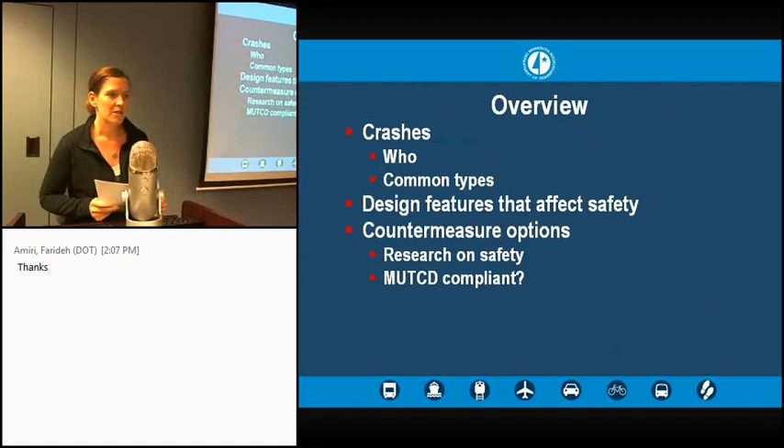Like Ken said, what we're going to cover today is really common crash types. Who is the most at risk to be in an accident as a bicycle or pedestrian? And common types of crashes, what causes bike and pedestrian crashes most often. Also, different design features that affect the safety of bikes and peds, and then countermeasure options. And I'll give a little bit of background on any research that's been done, and whether or not it's MUTCD compliant or experimental.

So, just some data. Last year, there were 868 pedestrian injuries and fatalities, and 35 of those were pedestrians who were killed. And then there were 822 cyclist injuries or fatalities and 6 cyclists killed. We often talk about how low the numbers are for pedestrian and bicycle fatalities, but I just wanted to point out how high the numbers are for crashes.

Or injuries actually. And a lot of these aren't necessarily serious injuries, but my argument is that any time a cyclist or pedestrian is getting tapped or injured or hurt, that's a problem. It doesn't take that much more speed or that much of a twist in fate, and it turns into a fatality. So these are things that we do need to pay attention to.

The national statistics also show that children, the elderly, racial and ethnic minorities, and economically disadvantaged areas are places that we really need to focus our efforts on too.

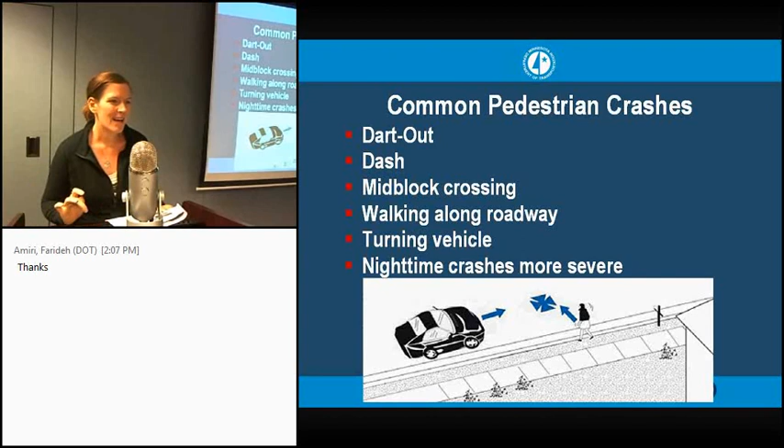So common bicyclist crashes at stop signs, actually the problem is both cars and bikes disobeying stop signs. And then alleys and driveways, if you've ever either ridden a bike past a driveway or had a car coming out of a driveway, it's often an expectation problem. You know, cyclists come up pretty fast on the sidewalks or trails, so just watching for those.

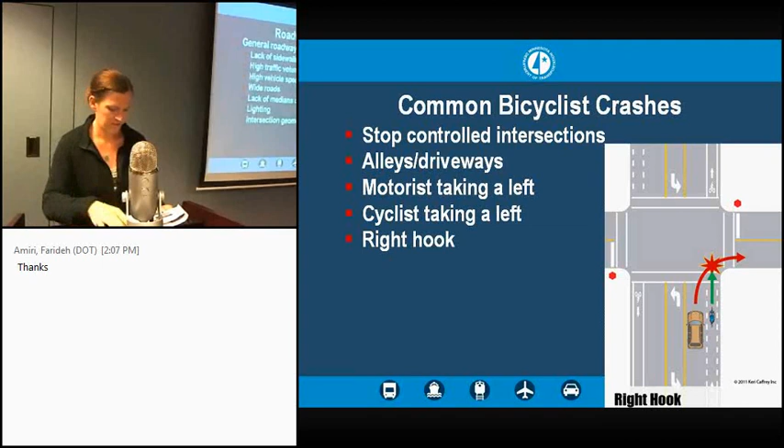And these are some general roadway features. A lot of these are more applicable for pedestrians, but lack of sidewalks, traffic volumes, high speed, wide roads, lack of medians, lighting, intersection geometrics. Especially for MnDOT, we have a lot of wide, fast roads, so these are definitely barriers for pedestrians and cyclists that we need to look at.

Now, I'm going to have a few slides of these countermeasure options, and there's going to be a ton of them. We're not going to go through all of them. I've highlighted a couple that we will go through in more detail, but I just kind of wanted to point out that there are a lot of countermeasures. There are a lot of different options for a lot of different crash types. So if you're having a specific issue, there's a lot of different things to look at out there to fix it.

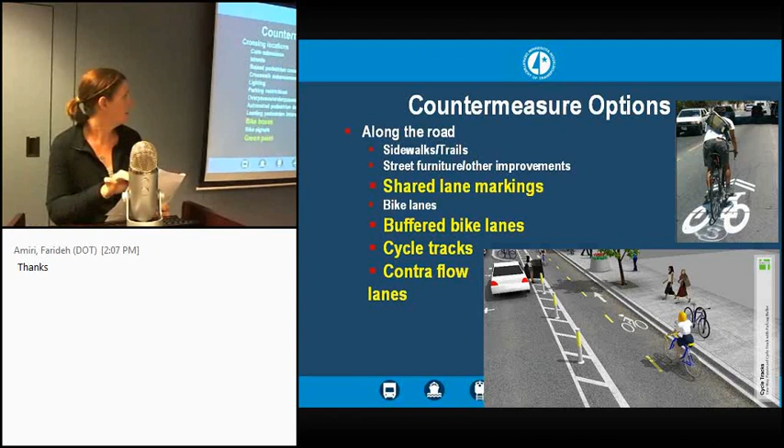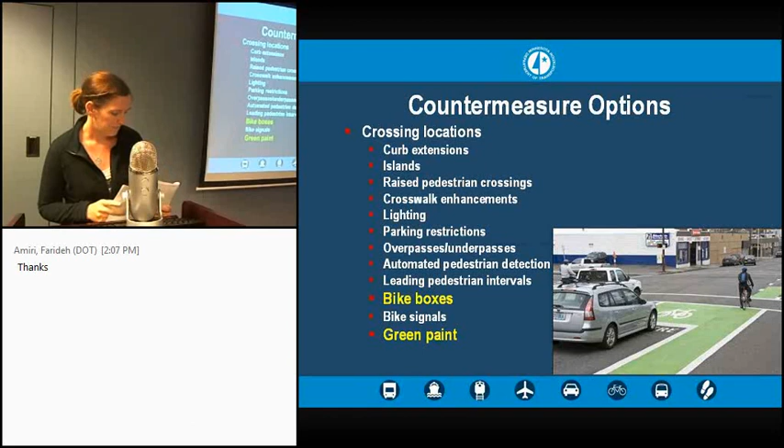So things along the road for both bikes and peds, especially sidewalks, bike lanes, things of that nature. Different types of countermeasures at intersections. If you remember the crash types that were the most common, a lot of them were intersections, turning vehicles, turning bikes, stop signs, things of that nature. So we'll go over a couple of those. And then the roadway design in general, as well as intersection design, so you can design from the ground up if you're starting a new project.

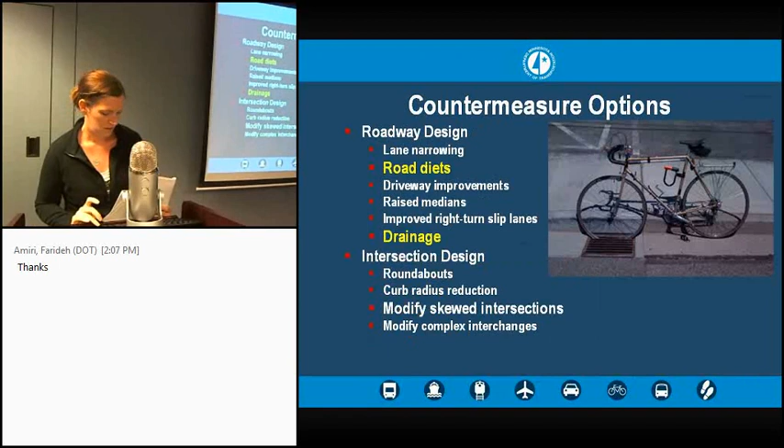And then some traffic management measures. These assist cyclists, pedestrians, and motor vehicles. So if you have access management issues, you can also think about doing things that maybe let bikes through or let pedestrians through, but keep cars from going that direction.

Like I said, there's a lot. So signs and signals, different things that you can do all the way from installing a full traffic signal to modifying a traffic signal, putting in different types of signs. We'll go through a couple of the more popular ones right now, the RRFB and the pedestrian hybrid beacon.

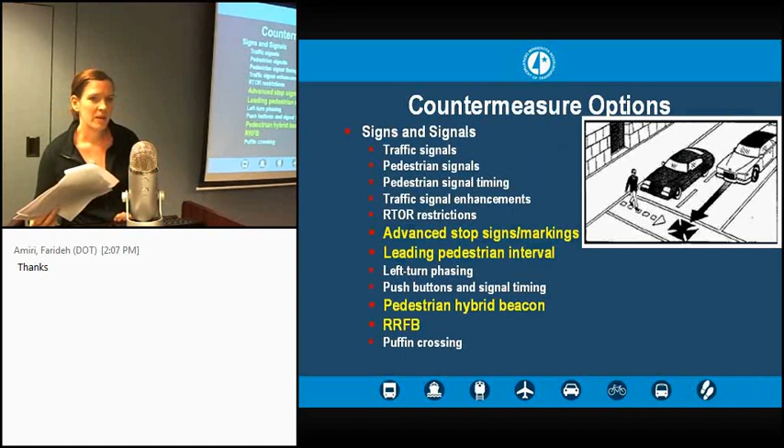And then others: education and enforcement are really important to couple with engineering, so we had to mention that. And then there are other just kind of random things: pedestrian streets and malls, traffic control during work zones, things like that.

So now we'll get a little bit more into the specifics of some design. I like this picture. I think it shows well how bike lanes can really be properly and improperly designed. Drainage is really important in a bike lane. Actually, maintenance just in general is really important in a bike lane: keeping it clear from debris, making sure that the pavement isn't too potholed, or else bikes can't use that bike lane.

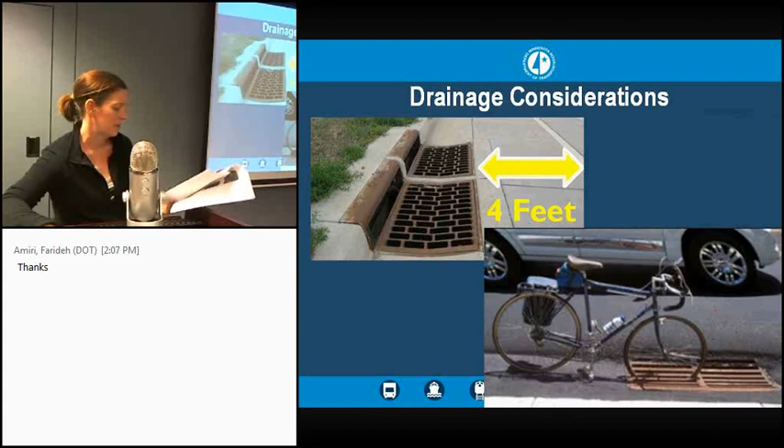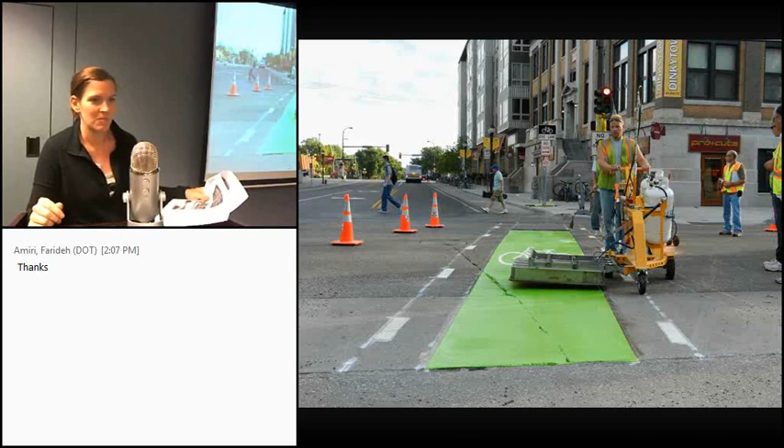The research showed that the yielding of cars in one study went from 87 to 96%. One of the interesting things they found was that more motorists actually signaled their intentions to turn, which I thought was kind of a strange output of a green bike lane. And more cyclists actually scanned for vehicles after the installation of the green bike lanes. Green paint for bike lanes is under interim approval for the MUTCD.

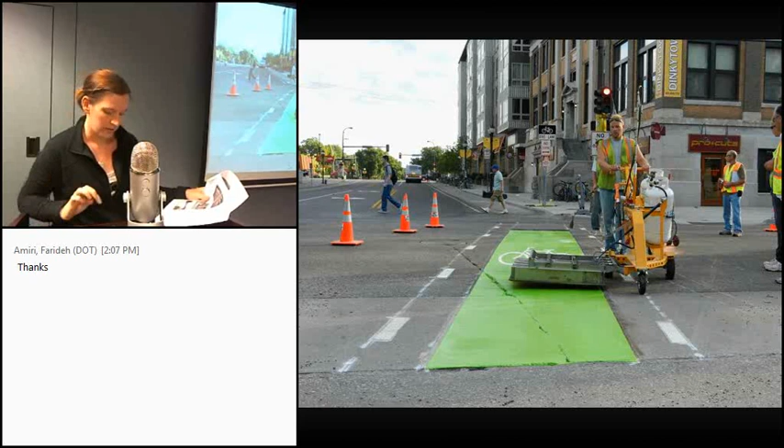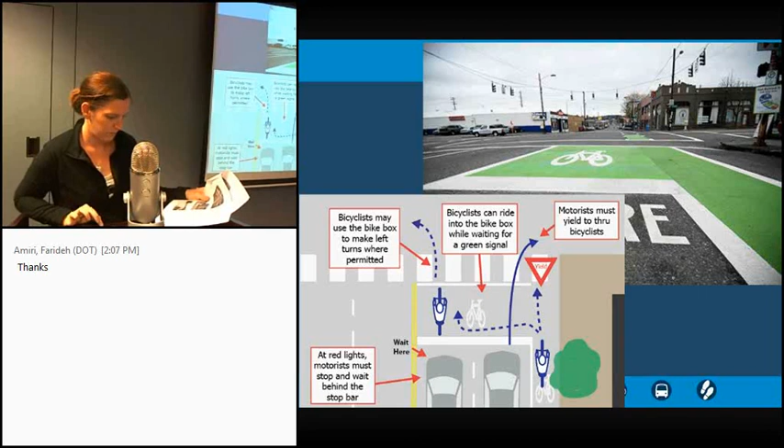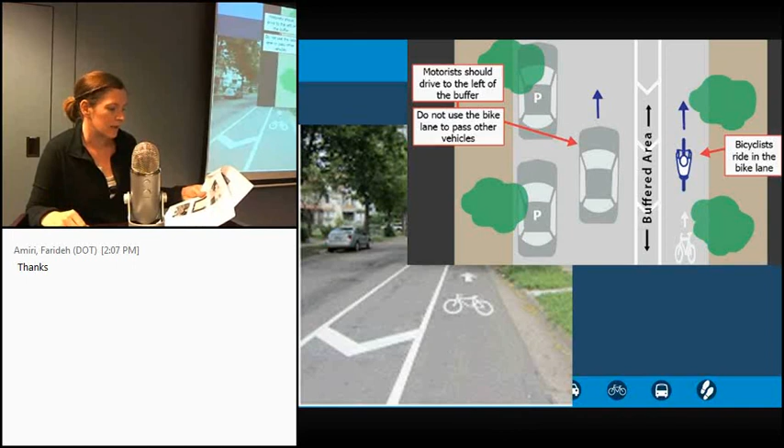This is called a buffered bike lane. These do decrease all types of crashes. They're allowed in the MUTCD. They also increase ridership and comfort, and one of MnDOT's goals is to increase bicycle ridership. They also decrease sidewalk riding, keeping bikes off the sidewalk. A lot of people are much more comfortable in these than in just a regular bike lane.

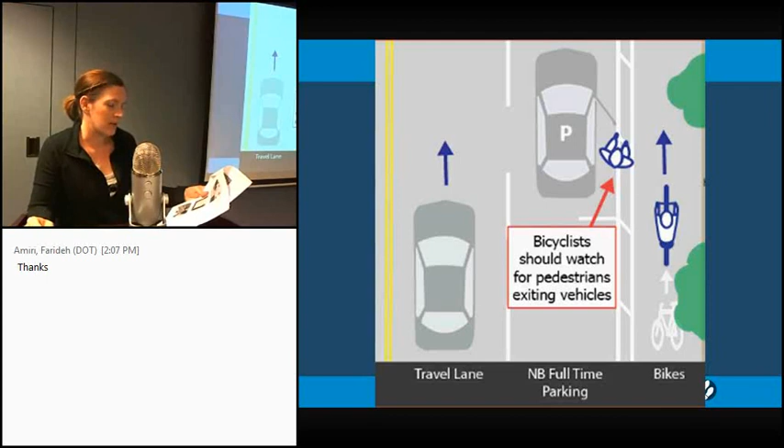The MUTCD doesn't actually control them, doesn't actually weigh in on them, but they are allowed. They reduce crashes of all types, increase ridership, and reduce sidewalk riding, just like buffered bike lanes. In New York City, they found that any street that they put a cycle track on, it reduced crashes of all types by an average of 40%. And on some roads they found up to an 80% reduction in all types of crashes. So they have a bit of a traffic calming effect. They separate the users. It can be a very effective solution for places with a lot of cyclists.

One thing I do want to point out, it's challenging to implement these at intersections. It's hard to get the turns right. It's hard to get everybody visible. It's pretty important to design these carefully at intersections.

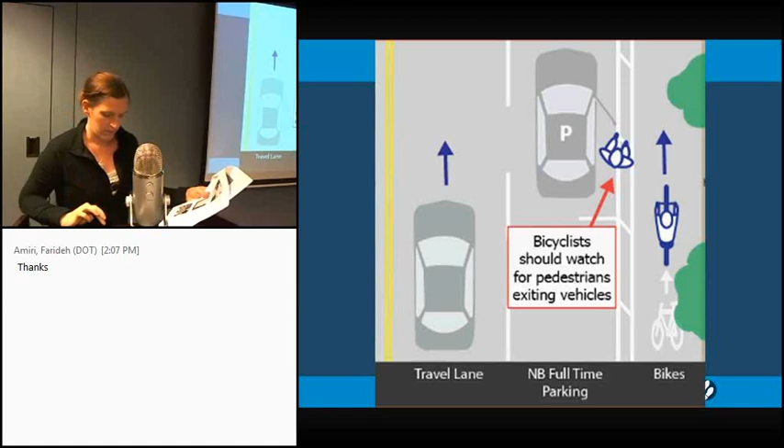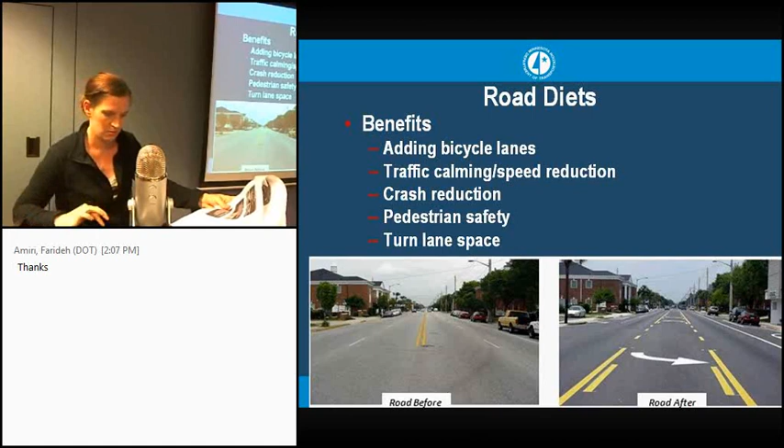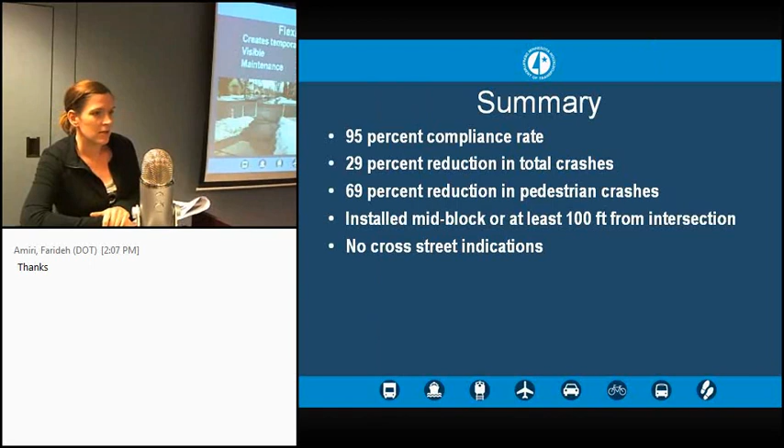I have one up in my office. It really just takes a little bit of a cordless drill. You can spin it right in. They can be removed just as easily. If anybody wants to see one, I would welcome you to come on up. And also, they're visible. You can get them in different colors. I have a bright green one. It looks like a lightsaber.

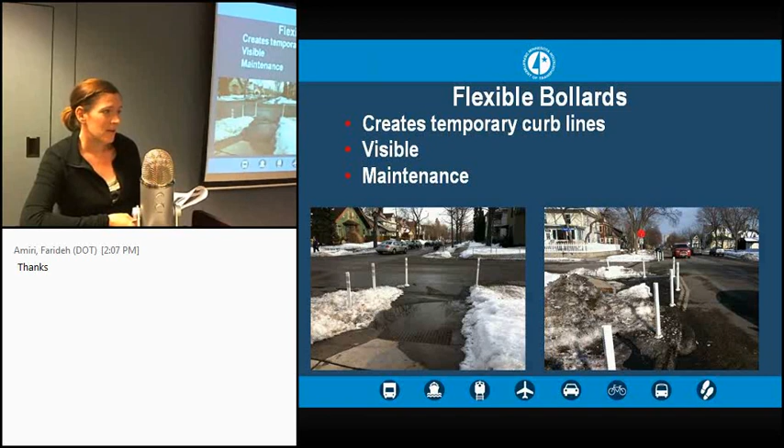But maintenance is obviously a concern. It's going to take additional snow maintenance. As you see here, I wanted to show you some pictures with snow. But if you're already clearing the sidewalks, you can make these work. And obviously they can get hit by snow plows, but they're also very easily replaceable, and they're easy to take down. So maybe they're not needed in the winter, but they are needed in the summer.

And then, like I said, I have to mention that education and enforcement are really important. So I hope most of you are aware, MnDOT has a campaign called Share the Road. There's a separate campaign for both bicycles and pedestrians. It has a lot of educational material on how to drive safely as a cyclist, how to walk safely as a pedestrian, and how to drive around them as a motorist.

And then I wanted to also share with you the Minnesota Department of Health, along with Minnesota Department of Transportation, teamed up and produced something called Walk Bike Fun. It's through our Safe Routes to School. So it teaches teachers how to teach safe walking and biking behaviors. This is for elementary school students. It's a really awesome and exciting program, and it's hitting kids right when they're kind of learning and out doing these things daily. And then enforcement.

I don't think any engineering solution to a really bad crash or pedestrian or cyclist problem is really going to take effect culturally unless you have education, enforcement, and an engineering solution. These things all need to work together, and they need to be sustained, and they need to be taken seriously. So you have to have enforcement on board if you really want to change the culture around cycling and walking.